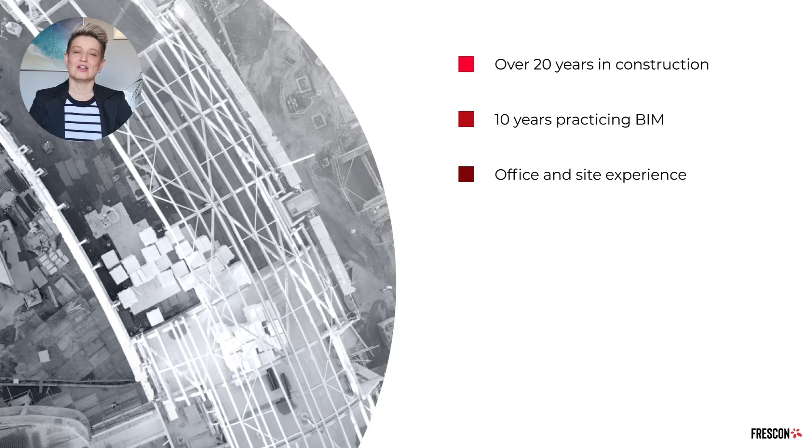I have over 20 years of construction experience. My BIM journey started about 10 years ago. Still, through my working years, I was lucky to experience construction from many different perspectives. From behind the desk and many times first-hand on site. Unfortunately, I couldn't find any photos and I'm usually too busy to take any. But here are two I prepared earlier today. I was working as a construction manager and as a plasterer at the very beginning of my career.

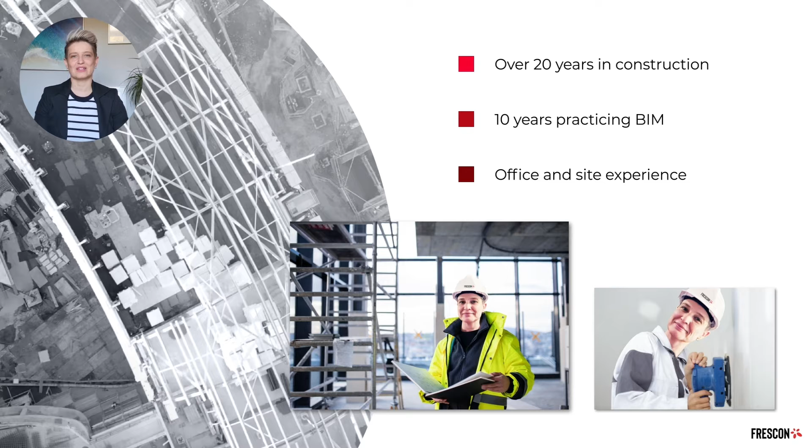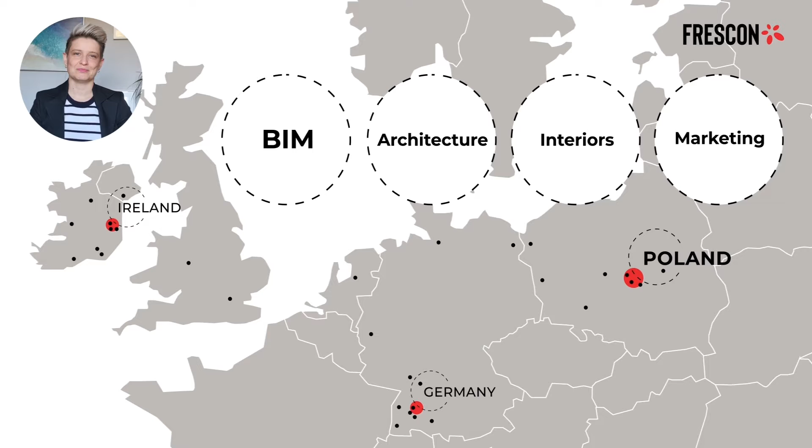But for the last 13 years, Frescon has been my life. I'm one of the founders and the CEO. We have provided many small to large-scale projects from our main office location in Łódź and operations in Germany and Ireland. But more importantly, we do this with an incredible team of talented people, and here they are.

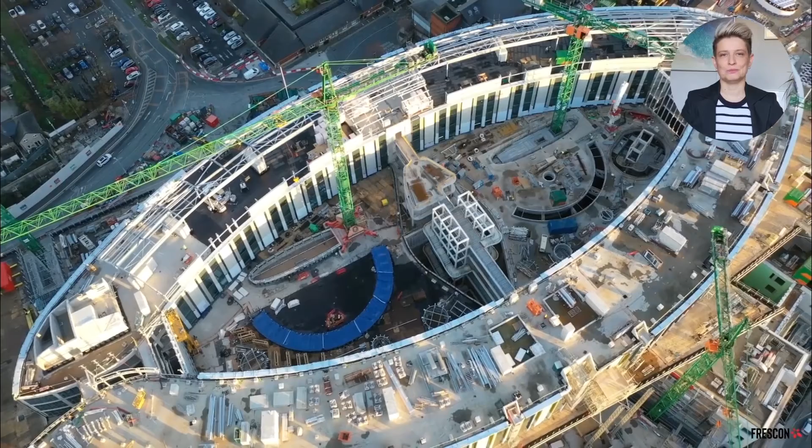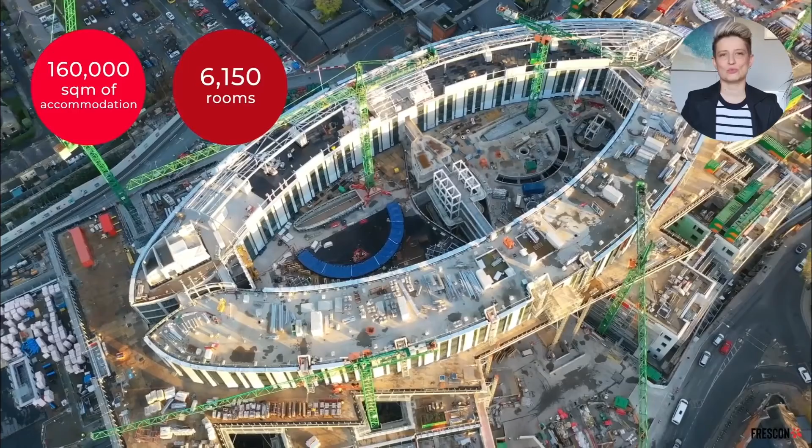The project I will discuss today is the National Children's Hospital in Dublin. It is in construction and is designed and coordinated in BIM Level 2. The hospital is going to provide 160,000 square meters of accommodation with a total of 6,150 rooms. The building has 2 basement levels, providing 1,000 car park spaces, and it is 7 stories high.

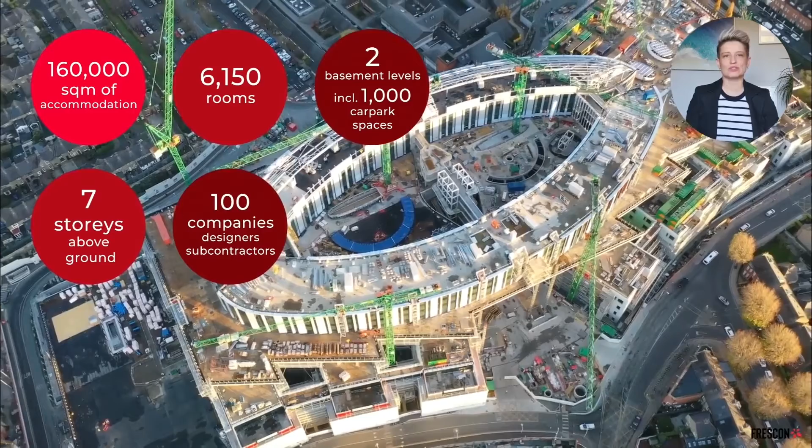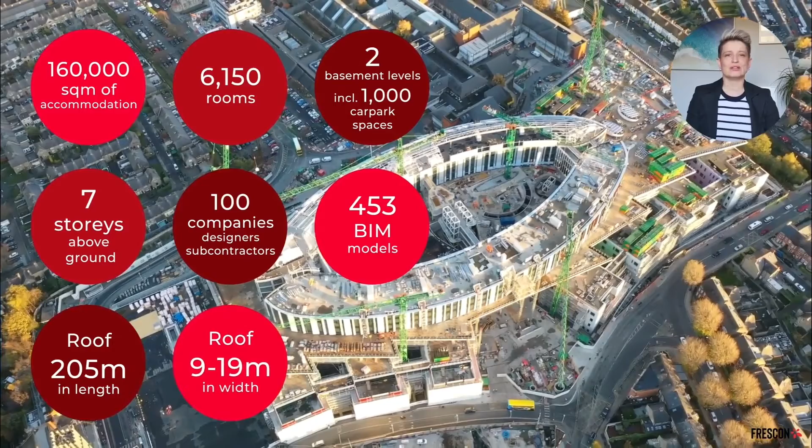There are over 100 companies involved in this project, from designers to subcontractors, who all have provided a total of 453 BIM models. The roof is 205 meters long and between 9 to 19 meters wide, about 4,400 square meters overall. In comparison, it is about half a football pitch.

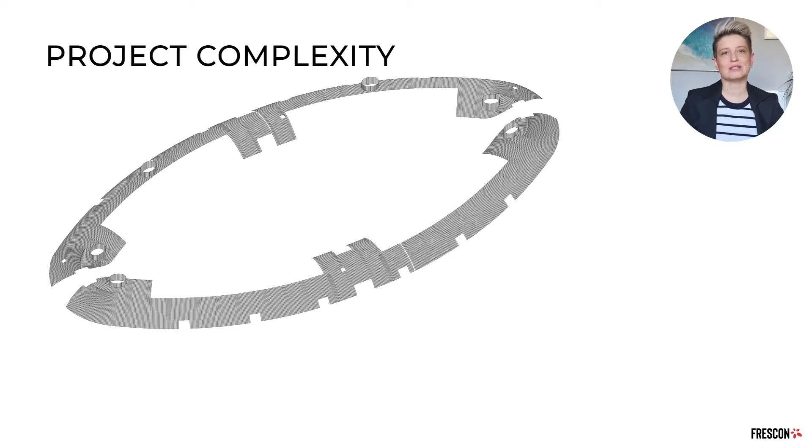Our client Select Roofing, a leading roofing and wall cladding contractor in Ireland, engaged us to support them in creating a BIM model of the standing seam roof design. Select Roofing has an impressive project portfolio. However, this project differed in its complexity. The main reasons that made the roof design complex were its oval shape, the curved roof area, and the narrowing of the oval shape towards the center of the building.

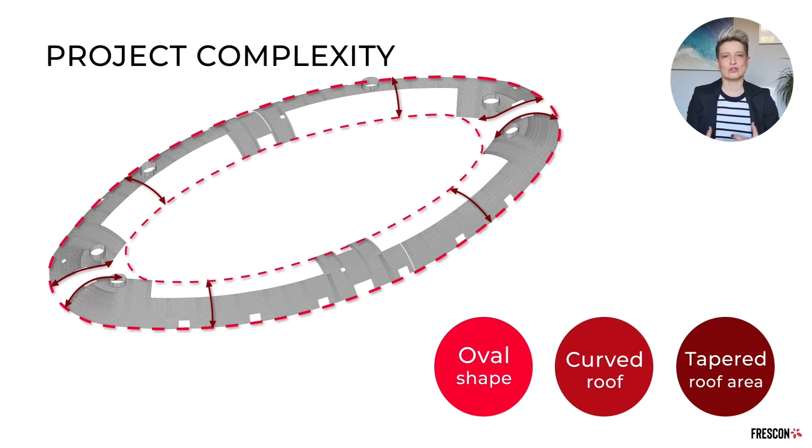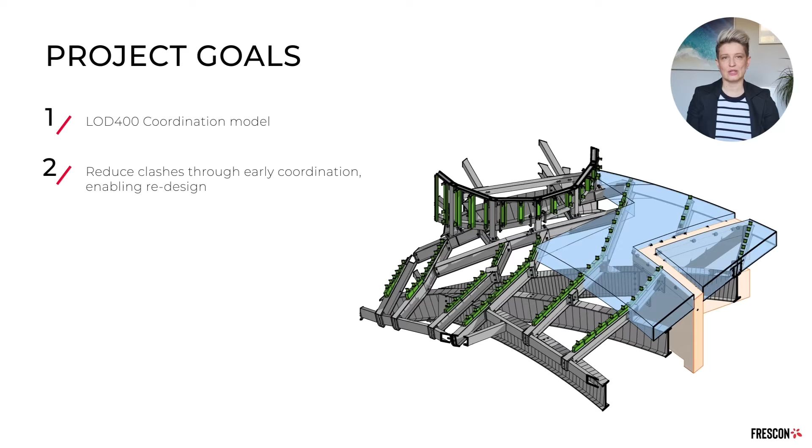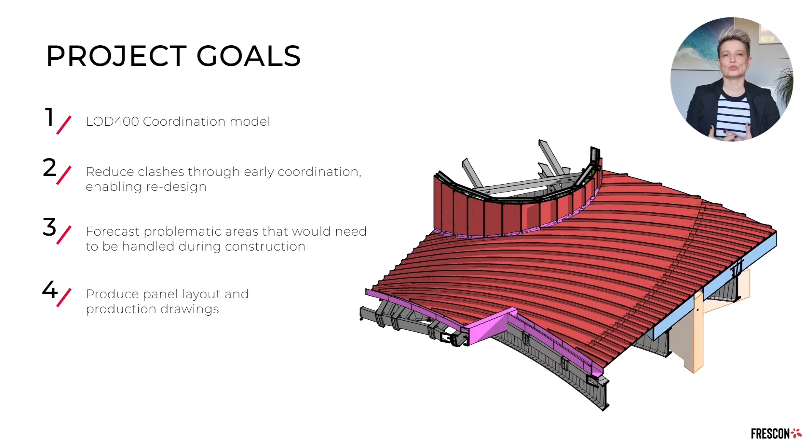A traditional approach to designing and coordinating this roof would have been significantly harder and would take much longer than in a 3D environment. The main goal was to create an LOD 400 coordination model to reduce clashes through early coordination, enabling redesign before the installation start on site, to forecast problematic areas that would need to be handled during construction, and finally, to produce panel layout and production drawings for our client.

Before I go into the details of how we created the model and what we learned on the way, let me give you a perspective of the scale of the model itself. The model in its final state consists of 1,439 panels. This includes 2 main Revit families and 163 family types.

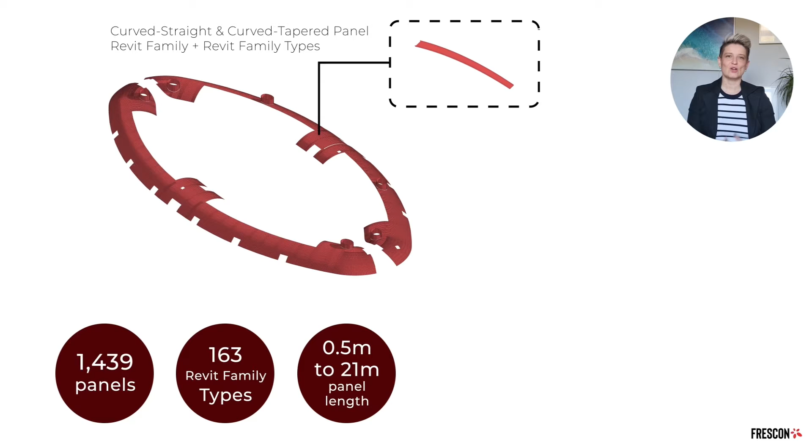The panels ranged from only half a meter to 21 meters in length, and if we were to align all panels one after the other, we could get a total length of about 13 kilometers, or 1.5 times the height of Mount Everest. It also consisted of 5,083 C-channels, 10,710 halter clips, and 373 flashing and gutter elements.

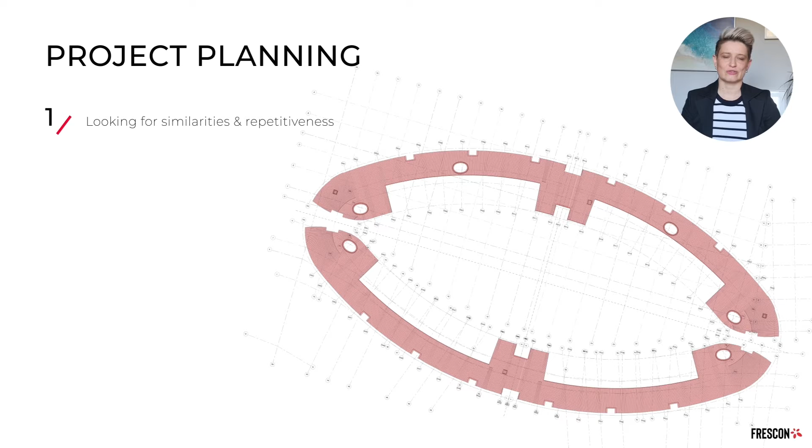So, how to plan your work when you don't quite know where to start? Well, that was what we asked ourselves when we started this project. We began by reviewing the architect's design to understand it better. We were looking for similarities and repetitiveness. We knew that this would be helpful through the modeling process and the installation phase. We reviewed the setup of the grid lines, the roof arc constraints, the overall layout, and of course the chimneys.

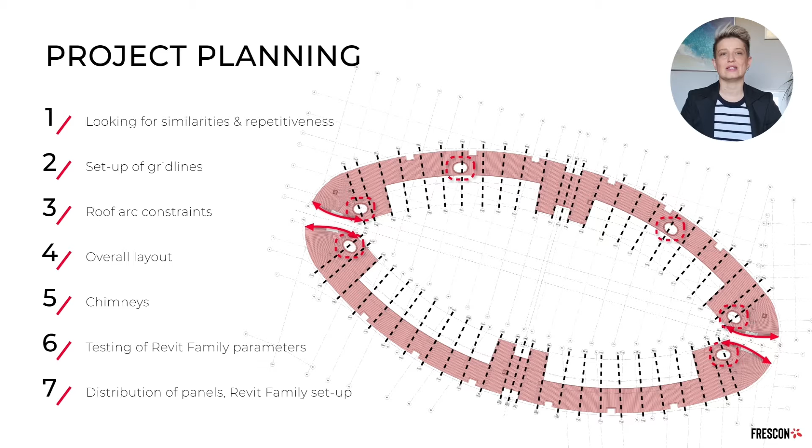We also spent a lot of time testing all possible Revit family parameters and combinations to find the optimal solution. From this point, we could decide how to distribute the panels, how many Revit families were required, and how to set them up. This was the most important step. Good preparation was essential to enable a smooth modeling and coordination process.

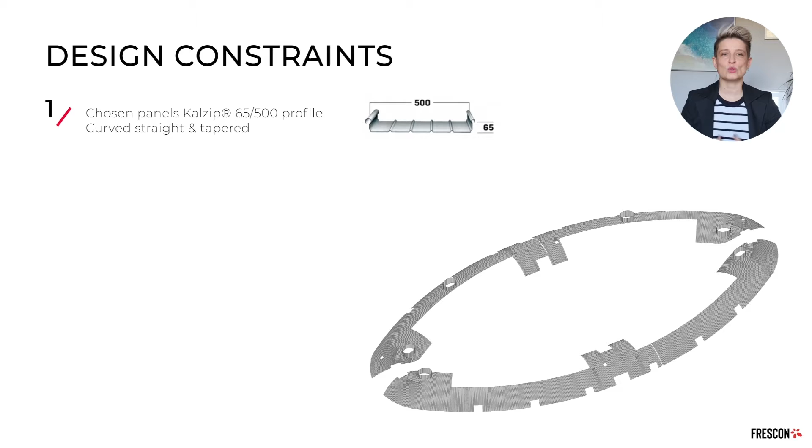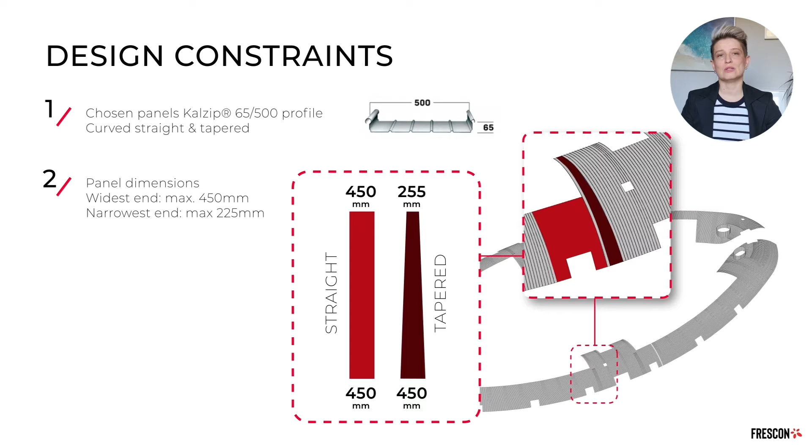Our second challenge was to keep in line with design constraints. The chosen panels for this roof were curved, straight and tapered Kalzip aluminium standing seam profiles. The width of a panel could not exceed 450 millimeters at its wide end or 225 millimeters at its narrow end. We also needed to find a panel layout that maintained a ratio of at least 25% of straight to tapered panels, as it would make the installation process faster and reduce the cost overall.

We tried different options. We used Dynamo to help us distribute the panels, but it did not give us an output that met all our requirements. In the end, we used Dynamo for the straight panel layout and decided to distribute all tapered panels manually. This also gave us an overall greater control. We finally managed to keep all constraints and could even increase the straight panel ratio to 54%.

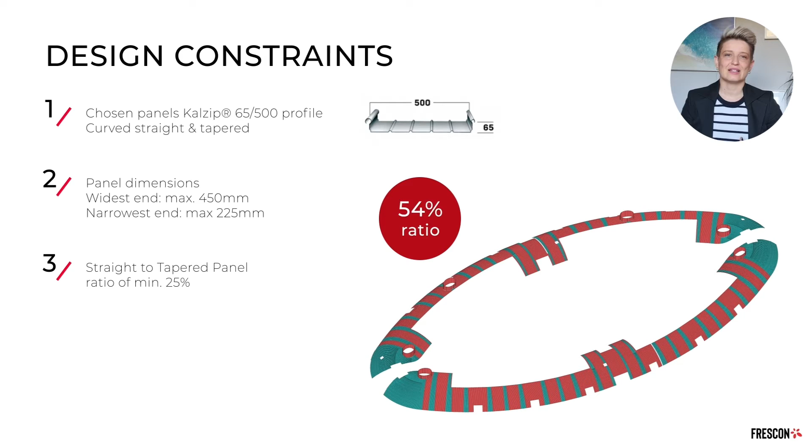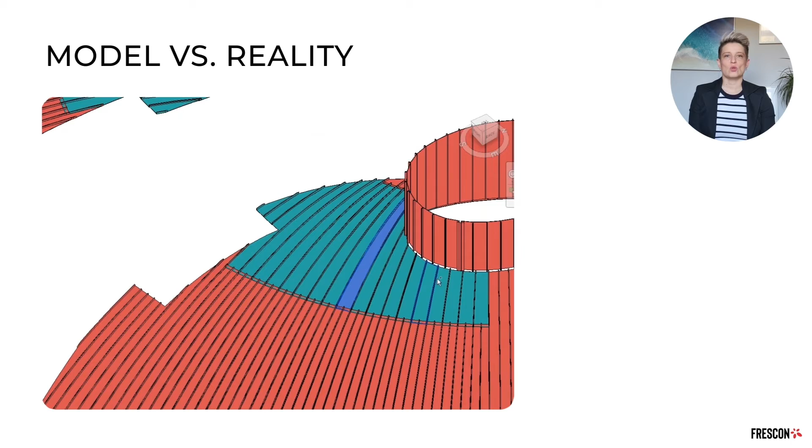It was a great result, and it meant that the installation time on site would be quicker and would further reduce the overall cost. The panels look the same when looking from a distance, but at a closer look, you can see that almost every panel is different in size. Because we follow the curve of the roof extents, many panels have different lengths. We, therefore, needed to create a Revit family that could be adjusted accordingly whilst being confident that these changes would not impact any other panels.

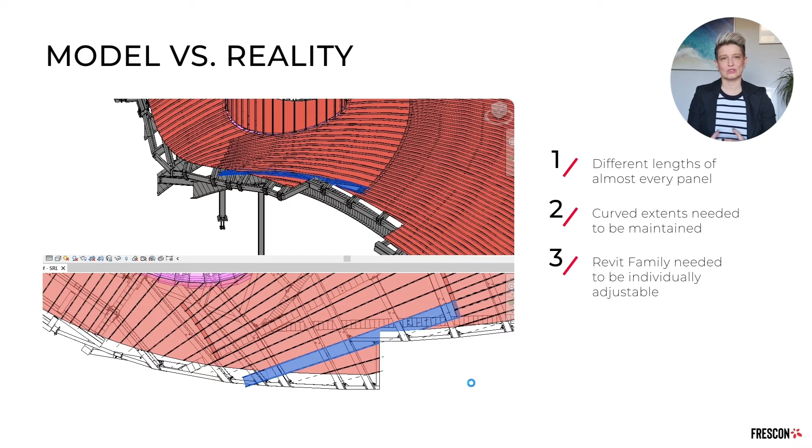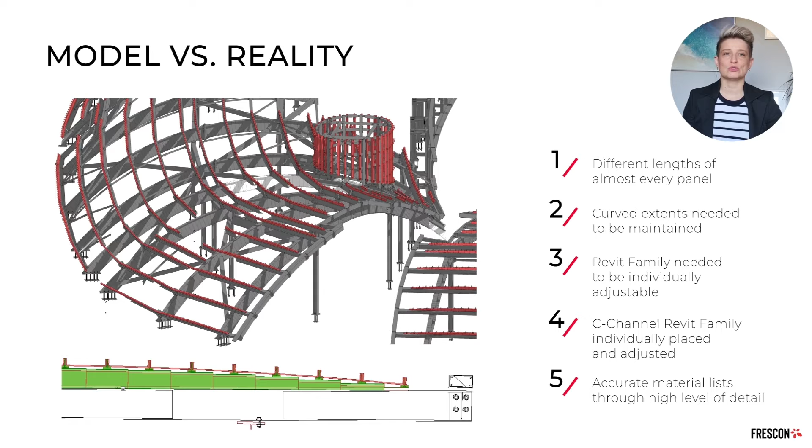The same was required with the distribution of the C-channels and halter clips along the steel structure. The height of the C-channels was different in every location. With this level of detail, we were able to produce a material order list for our client very quickly and with great accuracy.

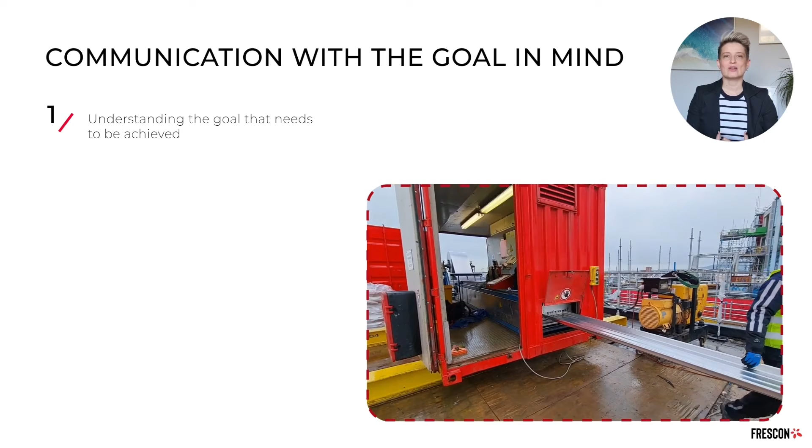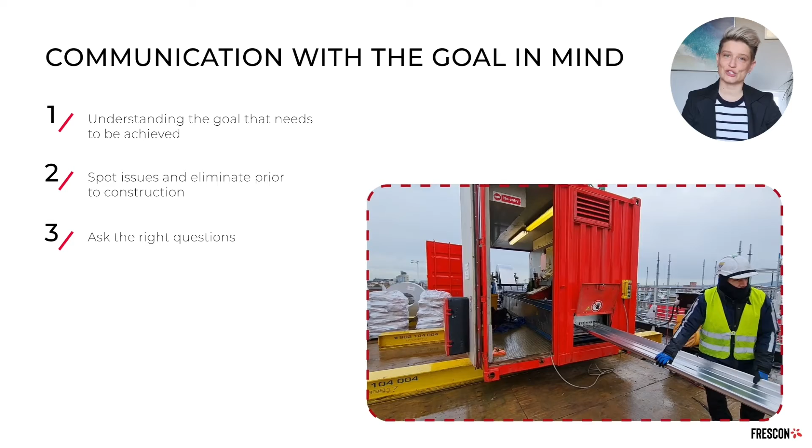One of the most critical factors when working in BIM and creating a coordination model is understanding the goal we need to achieve. Ultimately, our main goal for creating this model was to find any possible issues that might cause problems during construction and eliminate them before they do. We achieved this by asking the right questions. We focused on the design, but it was essential to fully understand the construction methodology and the installation process itself.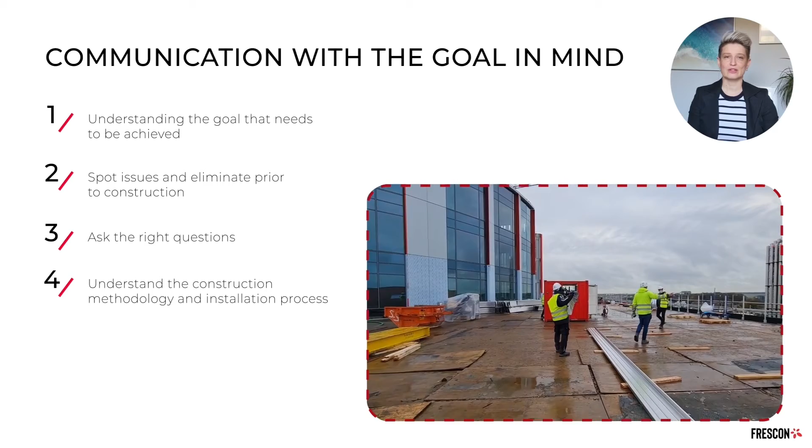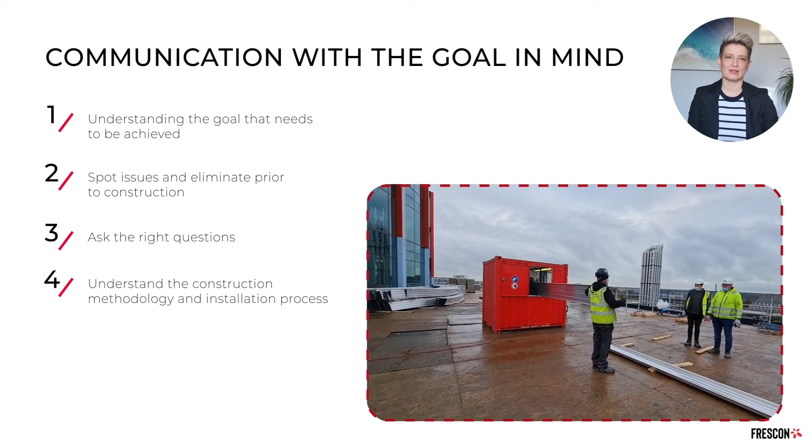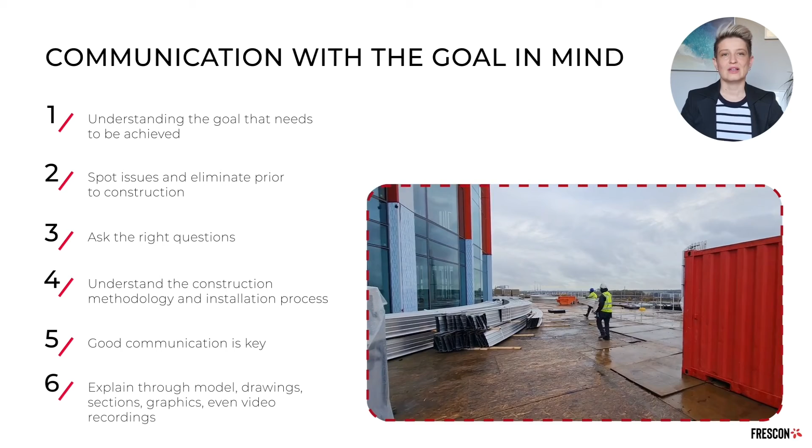For me, creating a BIM model is like a construction rehearsal, where we build the project virtually first, and the coordination process is like practicing. The more you practice, the fewer mistakes you make. Good communication with everyone involved was the key. During our coordination process with the client, we prepared all questions and explained them through drawings, sections, graphics, and of course the model itself, and even sometimes through video recordings.

In my experience, everyone wins using BIM. It is just in different measures. The designer wins because work can be planned better. The design process does take longer because of the coordination element. Still, in the end, if a project is well coordinated, then there aren't as many questions coming back during the construction phase. It not only saves time and money for the designer, but ultimately also for the contractor and the client.

Subcontractors win because they get more information through the BIM process, be it possible problem areas they can prepare for before they are on site. In addition, they get more information through measurements and very accurate material lists. The most important key here is that coordination before construction start is crucial, but too often it is still disregarded or not enough time allowed for it.

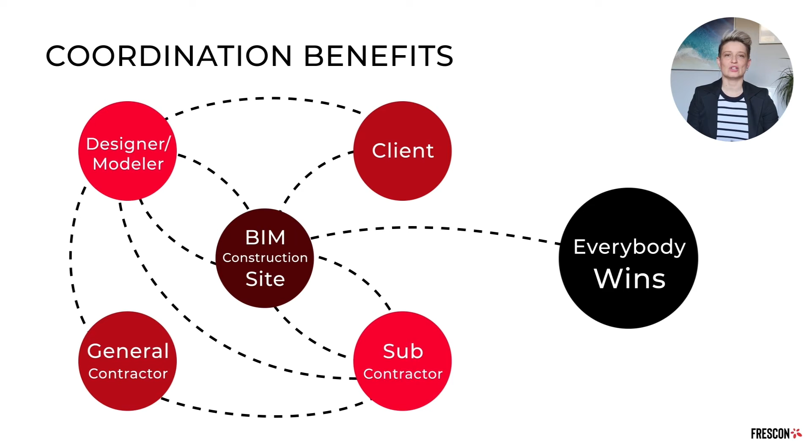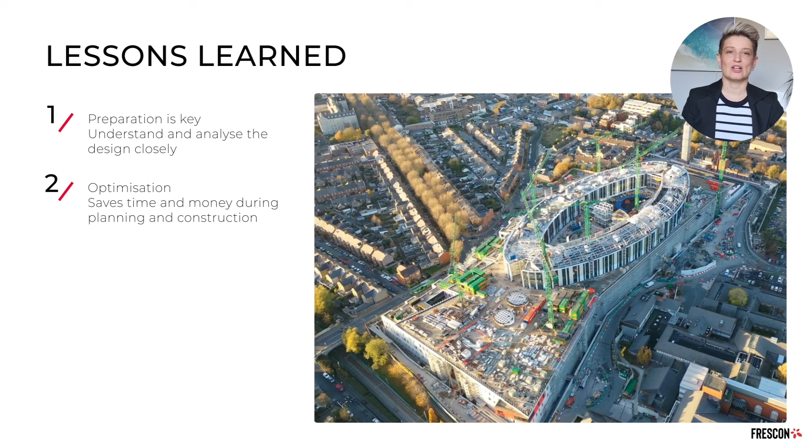Now I would like to finish my presentation with our most important lessons learned from this project, which also will apply to yours. Preparation is key. Understand your design and analyze how the model should be structured with repetitive elements and components. Optimization. Design and model optimization will save time and money during planning and construction. Design with the reality in mind. Never forget to think about how whatever you design or model is installed on site. It is for me probably the most important point. We can spot the problems before they can cause profound implications with this mindset.

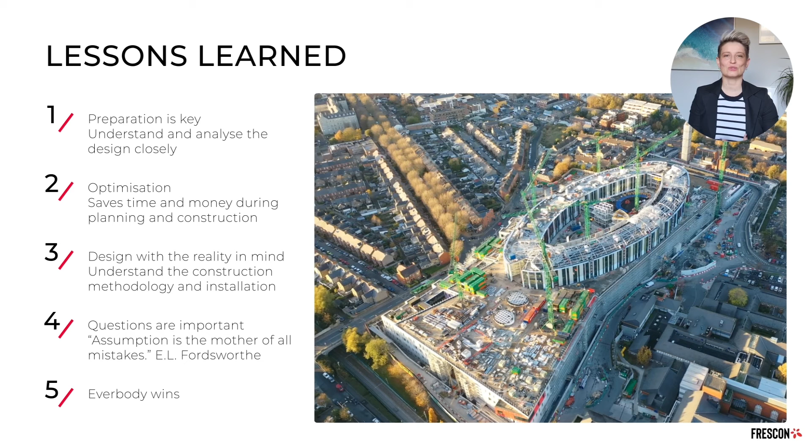Questions are important. As philosopher Eugene Louis Fordsworthe put it, and I'm going to use the censored version, assumption is the mother of all mistakes. So if anything else, remember to ask and never assume. And last but not least, don't forget, everybody wins.